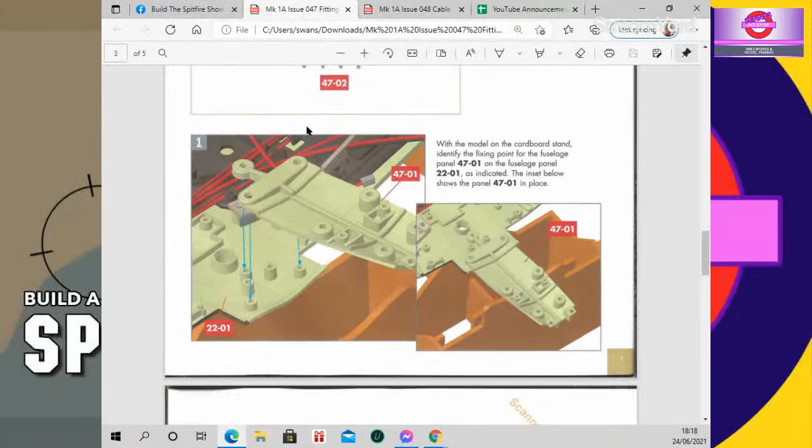So would you like to read the first instruction? I'll make that bigger for you, Chris, so that hopefully I can do it on my monitor. Yeah, no, I'll take up the whole screen with the instructions as well, so that other people can see it as well. Yeah, right. Zoom that in a bit more.

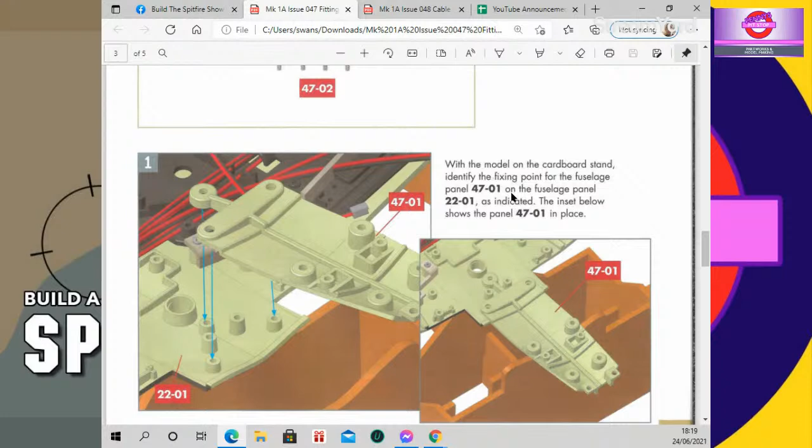There we are. So step 1 is, with the model on the cardboard stand, identify the fixing point for the fuselage panel 47-01. On the fuselage panel 22-01, as indicated, the inset below shows the panel 47-01 in place.

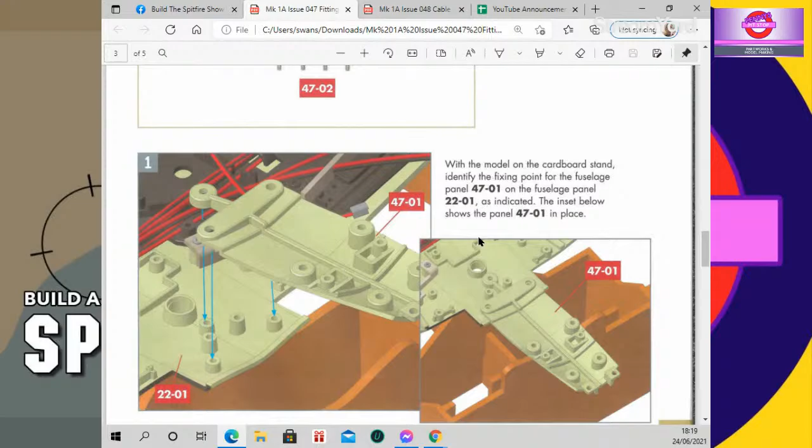Okay, so let's have a look. So I think it'll probably be easy if I switch the camera for this. So I'm going to be doing a lot of camera switches, I'm afraid.

Right, so it looks slightly more complicated than it is, because you've got 3 fixing points here. 1, 2, 3. And you've got 5 holes there. But when you actually bring this on, you can see that these 2 holes are there. I'm sorry that it's a difficult view, but these 2, we ignore them, and we're going for these bottom 2 here to fix this panel on, and then this one comes up through the middle just to add a little bit extra support. So that's going to go on like that.

And I think maybe I'm a little bit wary of this, because obviously this is only supported by cardboard, and we're doing screws into metal.

So obviously if I pushed, I'm going to be pushing hard because it's metal, but it's only supported by cardboard. So I'm really going to support it from underneath. That's why I'm going to do this top screw first.

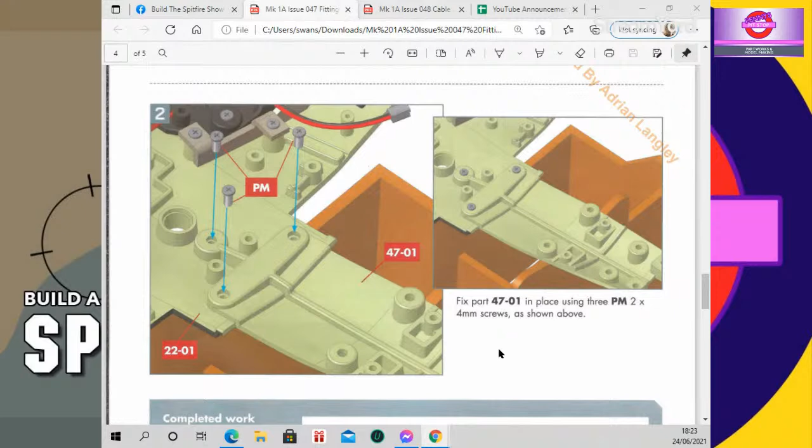Step 2 was fix part 47-01 in place using 3 PM 2 times 4 mil screws, as shown above. So that I've just done. Yeah, this is pretty true, bit of a lesson learned there. I just need to slow down a bit. Maybe I'm a little bit more eager than I thought I was.

Unless it's actually convenient to do that. That's right, I worry about being in a muddle. So that is issue 47 done. I've got a feeling this is going to be much shorter than I thought it was going to be.

There's one part of the hull, which is a cable to control the left aileron, whatever it's called. I'll show you a preview before we go into it. That's the part. So again, this is going to be really short as well.

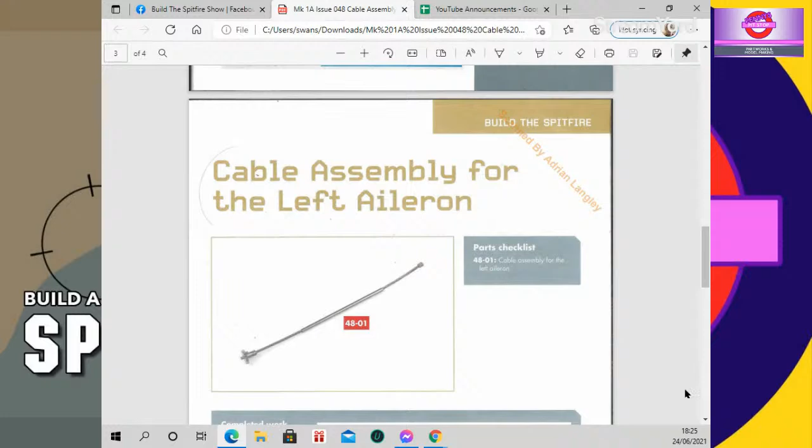And we've got 48 ready on the screen. Issue 48, which is: in this issue, a cable for a cog attached to one end is supplied. This will be fitted in a future issue. So basically, we've just done this issue just literally by taking the plastic off. Cable assembly for the left aileron. It's a tricky word, there's a lot of people who don't pronounce it, and I struggle with it sometimes, but it's aileron. Yeah, and it's the 48-01 cable assembly for the left aileron, and that's it for this issue.

Okay, so let's see how much time I could possibly fill in just on a single part. So what we have is a cable with a cog on the end, and there's obviously some kind of locating peg there.

And then we've got this - would you call that twisted cable? It's cable that's been twisted together to strengthen it. And I notice it's got this sleeve on it, and I know there's a word for that sleeve. I'd suspect there's a little channel going along here. So this is going to go into the wing, and this metal sleeve will sit on there.

If we didn't have that sleeve, as it turns, that twisted cable is going to rub up against the plastic and wear it out. So what this is there for is just so as this goes round, it protects whatever this is sitting on. I know there's a name for this and I cannot remember, and I will bet any money that Love Minis will be the first one to come back with the correct terminology.

I just can't think what it's called. It just escapes me. So yeah, unfortunately guys, that is issue 48.

Yeah, and then so we've got part 49-01, motor and cable. Lovely, so let me move it to this view so you can see the parts. So part 49-01 - now that looks to me, Love Minis would know more than this because she knows so much about electronics. Yeah, that's obviously a geared motor because it's got gears in it, which obviously changes the ratios and the torque.

But I would suspect that because this is going to be going near the flaps, it's a motor that's going backwards and forwards. I would guess that's a stepper motor, not an ordinary DC motor - there's three kinds of motors, and I'm so out of touch with this, but I think this is a stepper motor. And what a stepper motor is, it's controlled by magnets, and it can give very precise movements backwards and forwards by moving this magnetic field around. Whereas a DC motor is literally give it power and it goes round, give it power, change the terminals around, and it goes the other way. This is actually capable of going backwards and forwards.

Yeah, but I might be wrong because I don't know an awful lot about electronics. I've dabbled with Arduinos and things, and it is quite literally a dabble. So this has got 4 wires on it as well, so that's another reason why I think it might be a stepper motor, because they tend to have more wires. Servo, that's the other motor, isn't it? Yeah, so DC motors just tend to go round and round. Stepper motors are very precise movements. Servos tend to just go that.

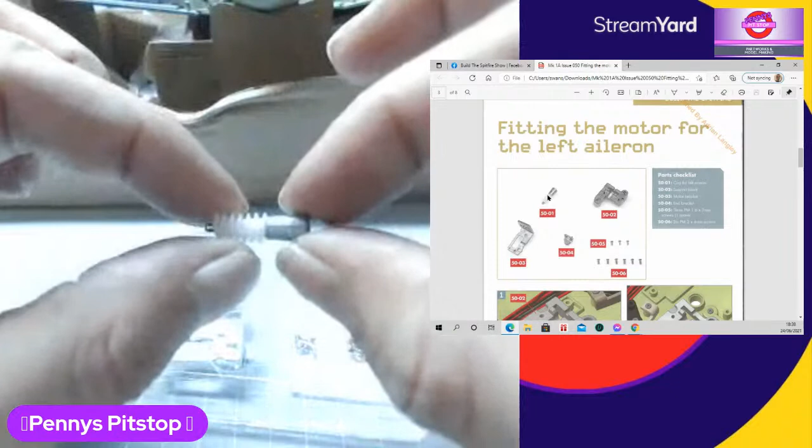Sorry, let me just - that's absolutely terrible. This camera I've got is cheap and it's manual focus, but it's actually really good for the money. But because it's fixed focus, you need to figure out.

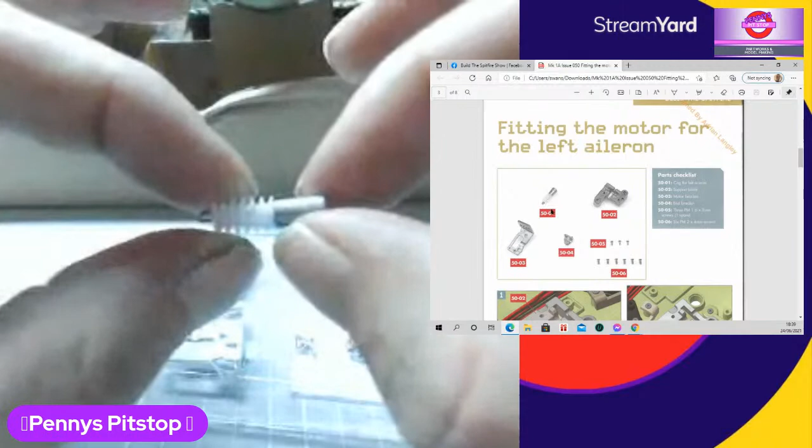So as you can see, this is a metal piece with a little plastic cog, and as you can see from this, it's a screw thread. And as I turn it, I've got my fingernail in the thread, and it's basically a screw thread. So obviously, as this controls something, it's going to push something backwards and forwards.

Okay, so 50-02, support block - I mean not 'black' but 'block'. So I read it as 'back'. So this is the support block, and I noticed it's got the letter L on it, and it's metal. So this is going to make the wing look a little bit meaty, I think.

Okay, so 50-03, which is motor bracket. Right, so obviously because of the title of the piece, that's where the motor is going to sit. Yeah, and that's got an L on it as well.

And 4 is end bracket. So this is it - now this is a very small piece, and I can see that going flying. It's got this little block bit on the end, and just like all the others, it's got a little locating tab on it, so that's useful. And there we go, it's got the letter L on it.

So if we were to open 6 or 7 weeks worth of parts, we could still identify these from the ones that are going to go on the other side. And then part 5 is 3mm, 1.6 times 3 mil screws, 1 spare.

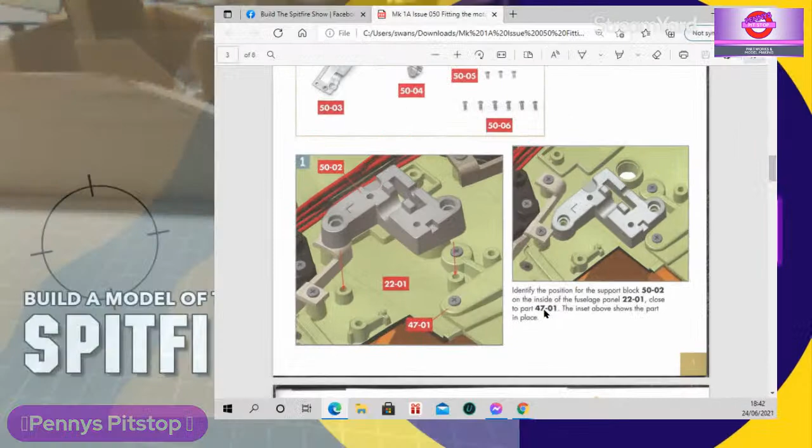Identify the position for the support block 50-02 on the inside of the fuselage panel 22-01.

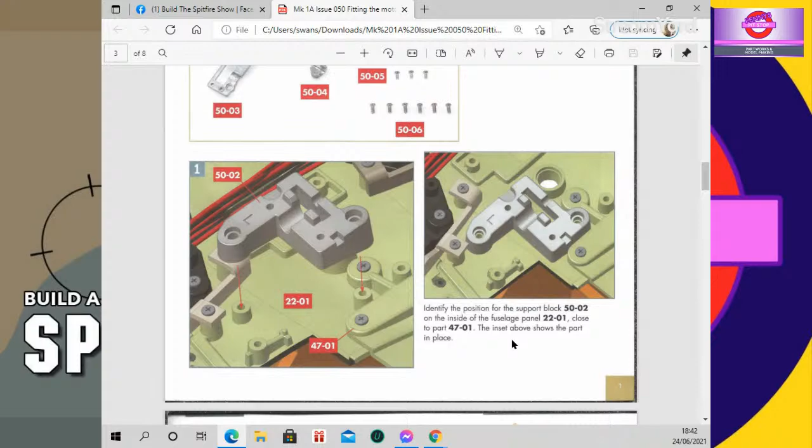Close to part 47-01, the inset above shows the part in place. I've switched to overhead view, apologies if it's difficult to see, but we want the left hand side.

I can clearly see that's a fuselage piece we put in a few weeks earlier. If you remember, there were 5 screws, and 2 screws that we ignored, and I can see it's one of the screws we ignored.

So if I get this motor block and support block, I can see the L is down there, so it's going to go in that position. You can see the L is there, and then there's the hole for the screw.

Look at that, that was almost like it was made to fit. Yeah, like that, and that is a really good fit, as it always tends to be for Hachette parts. I will give them that.

So I think that's stage 1 done. Are you happy with that? I'm very happy, yeah. That's good. Step 2 then, is it?

Yep, step 2. Oh sorry, you want the screen now, don't you? Right, step 2 is fix the support block 50-02 in place with 2 PM 2x4 mil screws as shown below.

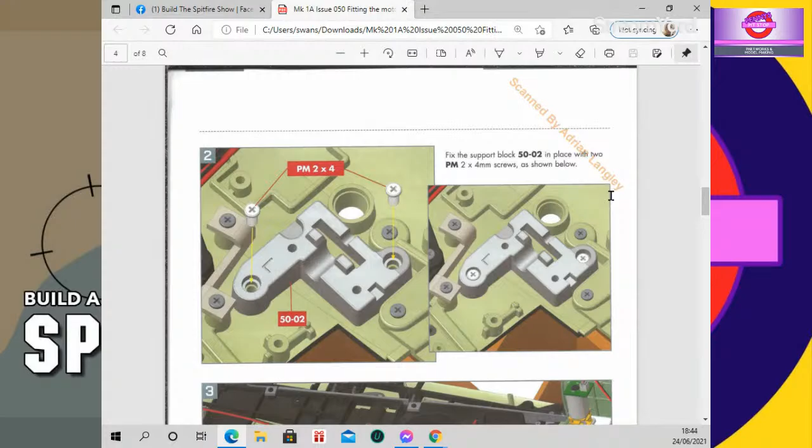Right, I'm just going to make sure I'm not in a muddle with the screws. The longer ones, 2x4 mil, the second set of screws, which I've got 6 of. So that's this set of screws there. I'll just pick 2 of them up.

Normally what I do is I just pop the first one in until it bites, then I pop the second one in. That way, if I've made a mistake, I can unscrew those. Also, now that those are in there just enough to bite, it's very loose, but it's not going to go anywhere.

So now I'm going to make sure I've got my fingers underneath, because I'm going to be pushing down onto cardboard. So we'll do this one in as far as it'll go. Just like before, it feels like I'm screwing into fresh air, but then all of a sudden it just goes home.

So the second one, now that's quite deceiving. That one took considerably more turns to tighten than the first one, but it just kind of catches you off guard a bit.

Right, and then just check that. The question you're always asking yourself is, am I happy with that? I honestly believe that piece is not going to go anywhere. Let me just bring that up to the camera so you can see what I've done, that piece there.

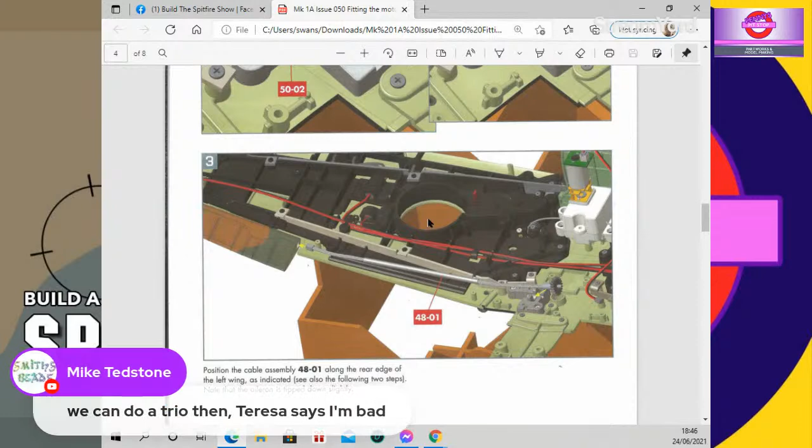So if you want to read out stage 3, I'll just catch up with the chat. Mike says we can do a trio then. Teresa says I'm bad, yeah, I was laughing at it. She says I don't sing, I howl. I think she doesn't appreciate good singing. I got caught singing in the shower, and someone said to me, I thought you said you don't sing. I said, I didn't say I don't sing, I said I can't sing.

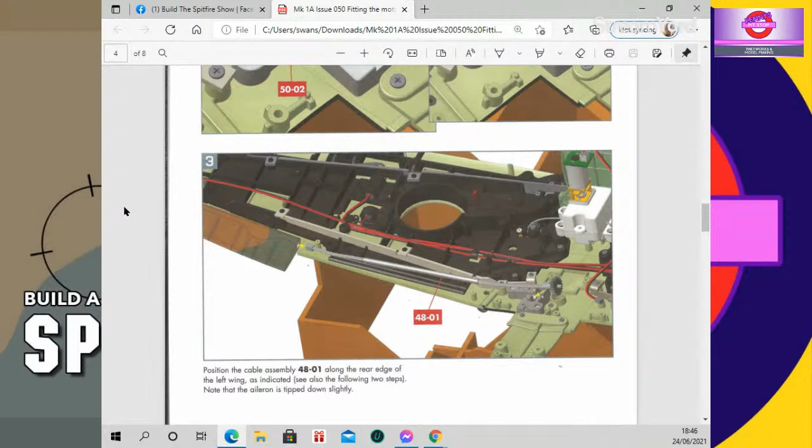Right, so step 3 then. Position the cable assembly 48-01 along the rear edge of the left wing as indicated.

See also the following 2 steps. Note that the aileron is tipped down slightly.

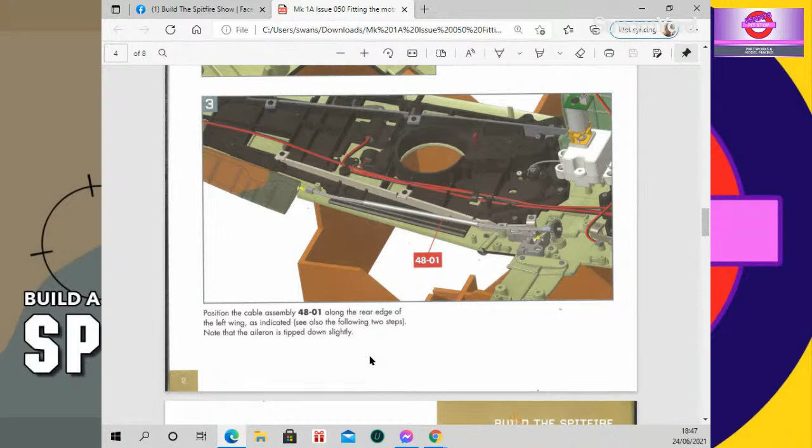I'm starting to suspect that that's why we've got a little tab.

Does it say which? Position the cable assembly 48-1 along the rear edge of the left wing, as indicated. Also see the following 2 steps. Right, as it's saying, see also the following 2 steps.

Yeah, we'll read into them now. Sometimes it doesn't hurt to look ahead. Number 4 says insert the small block on the end of the cable 48-1 into the square socket in the left aileron.

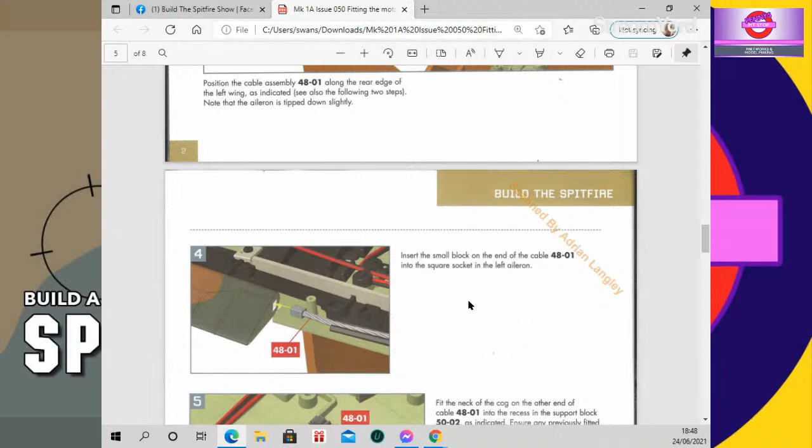Right, okay, in step 5. Yeah, 5 alive, 5 alive.

Johnny 5. Fit the neck of the cog on the other end of cable 48-1 into the recess in the support block 50-02 as indicated. Ensure any previously fitted wires are clear of the cable.

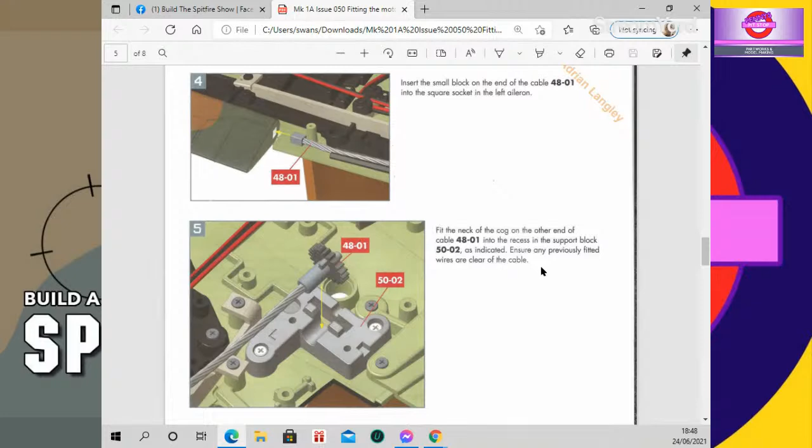Right, and I'm going to ask you to read step 6 as well, it will become apparent why. Step 6 shows the cog of part 48-1 in place in the support block. Note that the tab on the neck of the cog, circled, should be upwards and the ailerons slightly downwards. If this is not the case, reinsert the cable into the ailerons so that it is in the correct position.

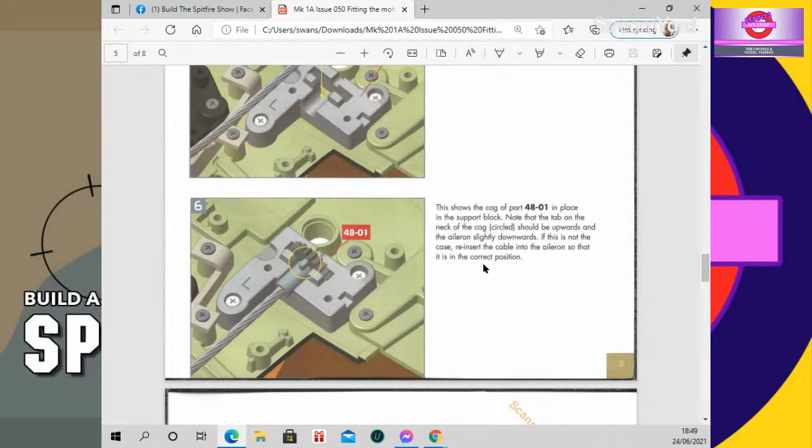So what I'm going to do, slightly cockeyed, is do a test fit first. We have this tab, and it looks like this tab is there to make sure we get it in the correct start position. So with the tab up and this little sleeve, I'm going to place the sleeve on there, then place the cog into there. But notice I'm not putting the other end into the flap, there is a very good reason for that.

One, I don't know how tight that hole is, I may not get it out if I put it in wrong. But if I focus on what this looks like, I can bring this flap up, and now I can start to see this square end on there compared to the square end.

So what I'm now going to do is, just holding this collar down, bring this cog up and out of the little housing. I'm just going to pull it back a little bit - it's very hard to see, and I apologize, but the little end of the wire isn't quite touching the flap. With this held down, I can then bring this up so that the flap is in position to meet up with that, and then turn that slightly, and now I can see the exact position we require. So that is a fairly stiff fit, but it needs to thread in a little bit.

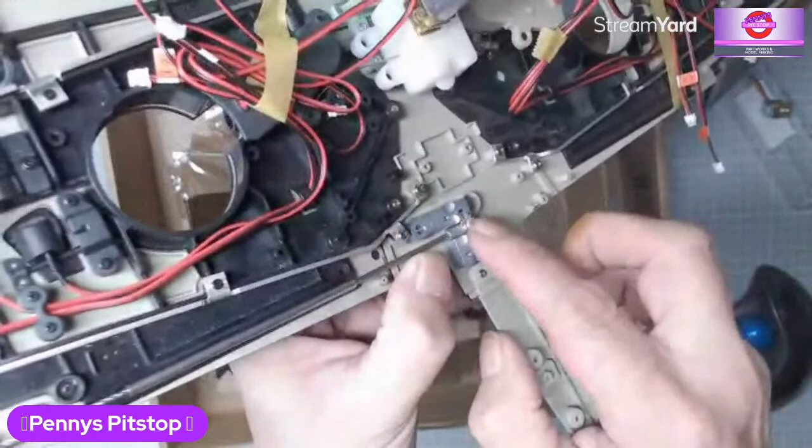Whether that makes mine incorrect, I don't know. But can you see that I'm moving this cog? And that little tab on there, there's two. Let me bring this up. So we've got the tab on there, but we've also got 2 little stoppers there as well. Let me get the screwdriver. So just there and just there, there's little stoppers, so it's limited the amount of travel the wing gets. It can only go that far up and it can only go that far down, and that gives us this much movement on the flap.

So as it's a square, if we readjusted it so that it's in a different position, that's going to move that wing 90 degrees up or 90 degrees down. And I think if we moved that 90 degrees, that would be so obviously wrong, wouldn't it? So I'm happy with that, I'm really, really happy with that.

Do you think, are you happy with that as a viewer, as an outsider, not the person building? Yeah, I think that's brilliant, I'm really happy with that. You know, if I designed this - and I'm not saying I'm a great designer or smart or anything, but I'm not design stupid - I really don't think I could come anywhere close to anything like this. So I really don't regret my decision to build this Spitfire. I think it's absolutely smashing, and I bet there's a lot of people who aren't building it that might be regretting it now. Yeah, look at that.

So, do you want to have a look at stage 7? Because there is a stage 7. In fact, there's a stage 12 as well.

How good is that? Stage 7 then, right, is take the motor bracket 50-03 and the motor and cable 49-01 from the previous issue. Fit the shaft of the motor through the hole in the bracket as indicated. Ensure that you have the motor in the correct orientation.

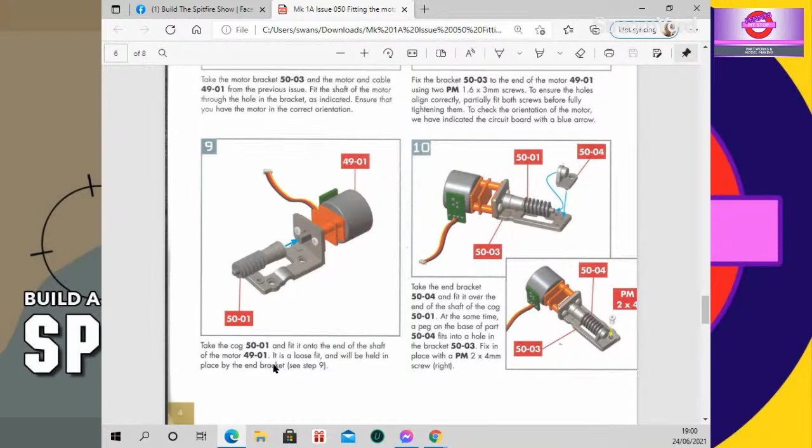Take the cog 50-01 and fit it onto the end of the shaft of the motor 49-01. It is a loose fit and will be held in place by the end bracket.

See step 9. Okay, so sometimes when you look at these parts, you're like, okay, they've given us these parts, I know what it's probably going to do, but I've got no idea how it's going to go together. But we'll just go along with it.

But now it all makes sense. So the end on this motor is not a circle, you can see it's got 2 flat ends. And this is exactly the same, flattened on 2 sides. So there's only 2 positions you can place this in - there's that way, or there's that way. And that just goes in there like that. All that's going to do is, as that motor goes around, it's going to turn those cogs. Simple as that. It is loose, look, so be very careful.

So I would perhaps just pop that down on the table now, and then we can look at the next part. And Love Mini says it's probably a bunch of people who designed it, so I suppose everybody just puts their little bit in, and the sum of the parts is greater than the whole kind of situation.

Well, this magazine's gone cuckoo at the minute. Can you scroll it down just a little bit? There we go - oh yeah, you drag, do you? No, I usually just use the button on the mouse. That's fine, however works best for you, Chris. Looking for the refresh button - let me just bring this magazine and refresh it a minute. It says the page has gone cooked. Right, okay, that's fine. Get yourself into a nice, comfortable position, you can work from there then.

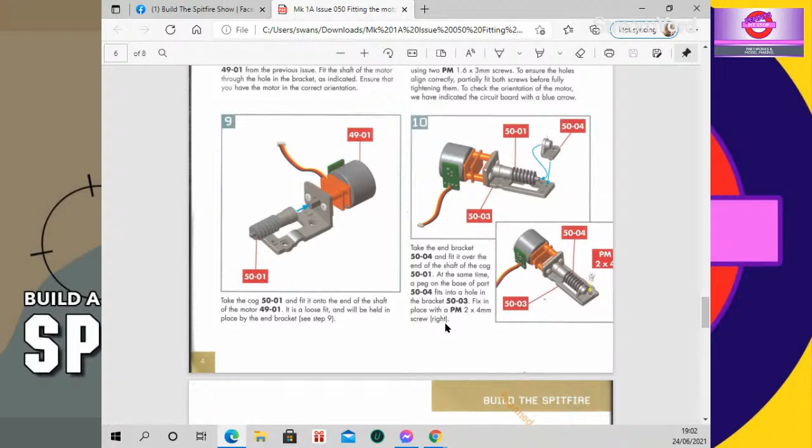Right, it says right on there for some reason. Oh right, as in that's the box on the right.

So I'd made the observation earlier on that this is a locating peg, and I can now see where that locating peg is going to go. There's two holes there - ignore that hole for now. The smaller one is a locating peg, and the larger hole is a screw hole. Although I noticed that little blob sticking out there, what I didn't look at was the hole on the other side, and I can now see that's going to go over there and hold that cog in place. So it's going to be ever so slightly fiddly, mainly due to the size of my fingers. I think the easiest way to do this is to get it into position how you want, put it over the cog, and then bring that locating peg into place. That will leave that screw hole there.

And then obviously that's going to be the 2x4mm screw. Be a little bit careful, that is trying to jump. If it's jumpy too much, what you could do is put a big piece of masking tape around there, leaving that hole exposed. But I'm not going to do that.

But what I should have done, and should do every single stage, and I never do, is get my 2x4mm screw ready on my screwdriver before I put these pieces together. Because I think it'll be easier once I've got that into position, I'm going to hold it down with my thumb so it doesn't move. Now I can grab my screwdriver with my screw loaded up, and in it goes. And once again, it's like screwing into air.

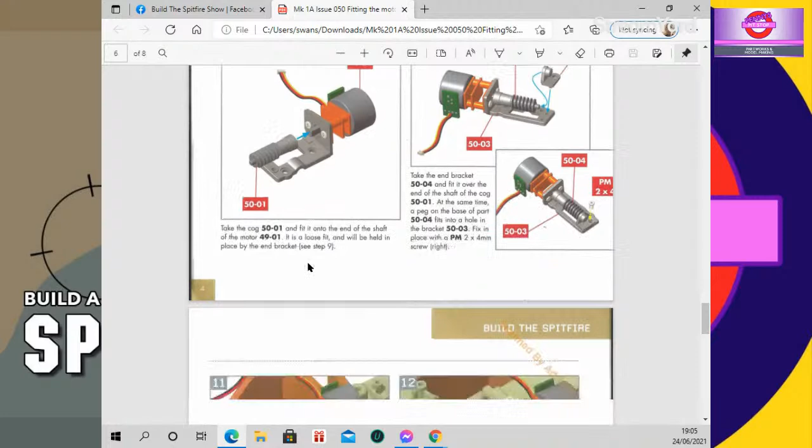Okay, so what is step 11 then? It's like bingo - legs 11. Yeah, that's how it goes. They've changed all the numbers on the bingo now, haven't they? They've modernized them. Apparently it's to try and attract a younger crowd to bingo, because I don't mind this myself.

Yeah, right, okay, step 11. Do you want me to read that, or are you comfortable reading that, Chris? I'm good, I am. Right, okay then, fire away. I'm trying to fix my extra beer.

Ensure that the rectangular peg on part 48.1 is pointing upwards, as circled. This means the aileron will be tipped slightly downwards. Fit the motor and cog assembly from step 10 over the cog on the end of cable 481 - oh, I missed a bit there - as indicated, an opening in the bracket 50-03 fits over the cog on cable 481 so the teeth engage with cog 50-01. Holes in bracket 50-03 align with screw sockets in the support block 52 as indicated.

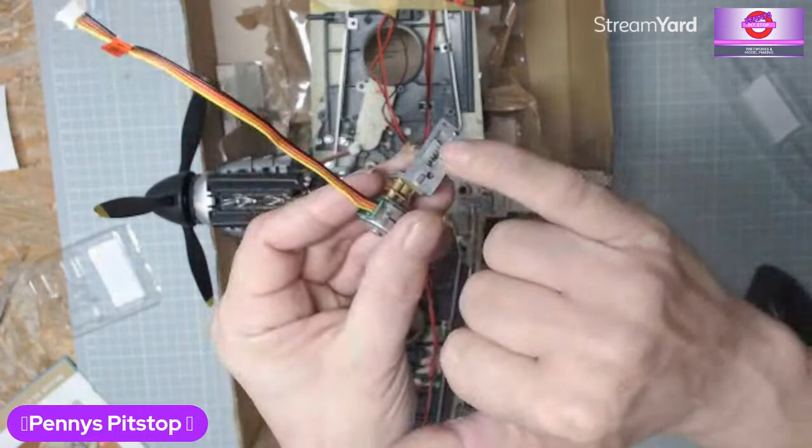And the situation we've got is we have this little hole in the bottom of the bracket, and that's going to enable to see this cog there. That's going to come through there. If you imagine my fingernail is the cog, that's going to come through and engage with the screw thread there. We've got the little humpback bit there, which is going to go over the cog. You see, we've got the collar there, so it's just going to enable it to jump over it.

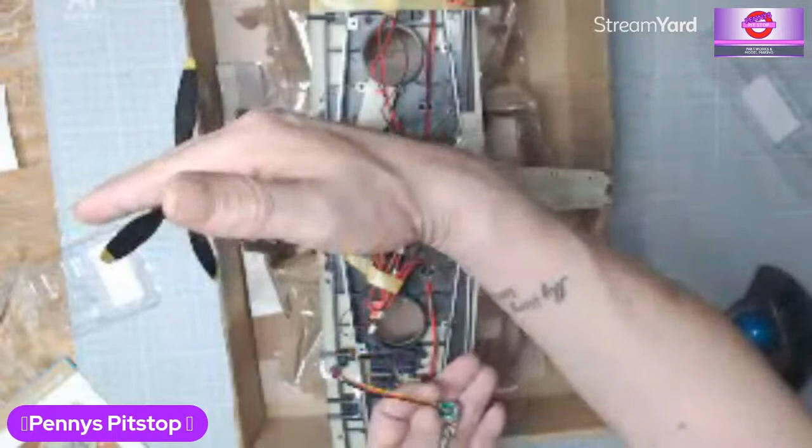And then we've got, let me see if I've got this the right way round. Right, so we've got two screw holes there which are then going to line up with - hang on, I've got to get my orientation, right - so it's actually going to go that way. So these two screw holes, if you turn your Spitfire, rotate it anti-clockwise so it's pointing at 9 o'clock, and then the L is coming down at 12 o'clock. This is then going to go at 3 o'clock with the wire going up at 12 o'clock. Does that make sense? Yeah.

Propellers, right, wire at 12 o'clock, rotate to 9 o'clock, and the wings coming down to 6 o'clock. So that will go over like that. Now the important thing is the little tab on the cog - I'm going to put it halfway between the stoppers. I think that's how it's indicated. If it's wrong, I know how to fix it. And that's going to go over like that.

And what have I just forgotten to do, Chris? No, it doesn't matter because that's the next step. Okay, right, so no - I was going to say I forgot to load my screwdriver up, but I haven't forgotten because it hasn't told us to do it yet. Right, so that is how that's going to go on.

So the motor, or this block, is going to be going backwards towards the tail, and that's how it goes. And I can see that looks like it's engaging. But I also think I had that wrong - I think it just slipped upwards a little bit, so I'm just going to move my camera slightly. But as I'm engaging this motor, I'm using the flap to just move this cog. Once I put this on, don't be tempted to move this flap too much, because you're working against this motor. And that's going to go on. But because of this wire and everything, it's going to be trying to pop off anyway until we get to stage 12, which is the next step.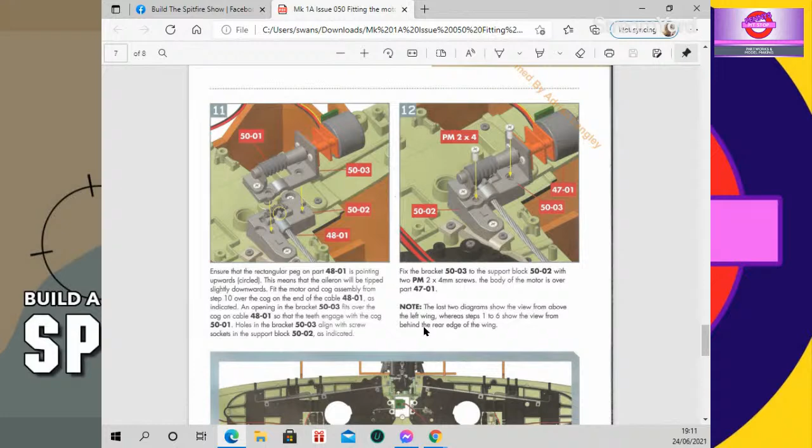That's easy enough, fantastic, right. So yeah, basically, there's a long-winded way of saying pop 2 screws in.

So what I'm going to do is hold this motor in place, and I want to see which screw is going to be easier for me to get to. The hard bit is getting the first screw in. Once you've got the first screw in, it'll hold it down a bit and make the second screw easier. I think it's going to be easier if I hold it there and put the screw in closest to the L.

So look, I've got my screw ready on the screwdriver. That's good, can you believe that? So we'll just pop that in just enough to bite. Yeah, and there, look, you see it's connected.

So now, before I put that second screw in, I just want to check the whole mechanism. It's worth taking a few extra seconds here. The motor is held down. This flap is in the slightly down position, not quite flush with the wing, which is what it was saying in the previous issues.

So now that that's in, I can hold it a little bit better. I'll put this second screw in, because this screw is the last screw, I can drive it all the way home. I want to just support it underneath, because remember it's on cardboard.

And then I'm going to just check the first one, or finish the first one off, and this one can go in as hard as I want. And then I'll just double check the last one, and that is not moving.

I can see another area of concern, which isn't really a problem. Can you see where that motor board is? Very, very close to the fuselage. Now, mine's got clearance, but I would suggest if you haven't got clearance, you've either not put this fuselage piece in, or you've not put the motor in.

So keep a careful eye on that motor board, because these circuit boards are really, really fragile. If you end up screwing that down and it's not engaging properly, it's going to snap it off. So just be very careful there. And then I would say that's step 12 done.

Yeah, so that's going to be extra. That's 4 issues done. And we know the next 3 issues are going to be exactly the same as the last 3 issues, but on the other side.

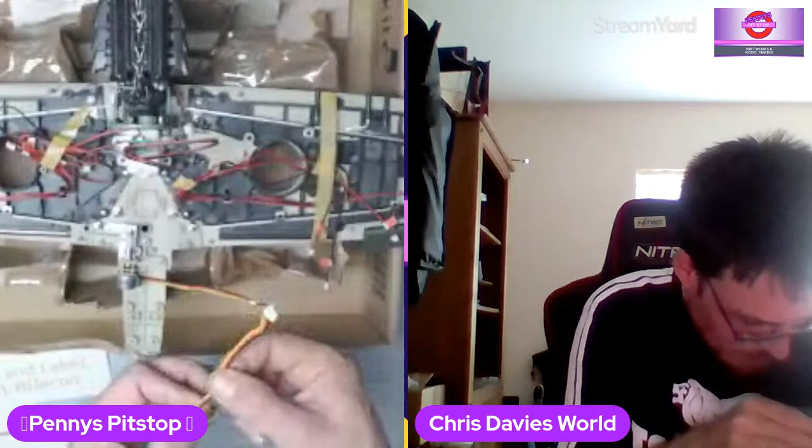So we've got 52.1, which is the motor and the cable, and then we've got 52.2, which is a cable label. And that surprised me - the cable label is M4, and the opposite aileron was M1, if you remember. So that surprised me.

I was expecting M2. So I guess M2 and M3 is going to be... oh sorry, I'm doing it at the wrong end. Remember, it's got to be at the end. My personal preference, I like it about a finger width away from the end, just to prevent a bit of wear and tear when I plug this into the circuit board. And that is issue 52 complete.

And just like before, I'm going to pop that in there like that. Now, I feel like I'm rushing, but I'm not - it's because I've done this before. Obviously it's a little bit easier this time. And I think to explain everything to you all in great, massive detail is almost going to be a bit of an insult, isn't it, because you've just sat there and listened to it in the last 10 minutes.

But I'm just going to have a quick mouthful of drink. You in a whiskey? I don't know - do you know, I'm not a big whiskey fan. There's a couple of spirits that I do like. But obviously, do you know, this will make you laugh - I don't understand all of this science about how much alcohol you can have and how long it takes to get out of your system before you're allowed to drive again.

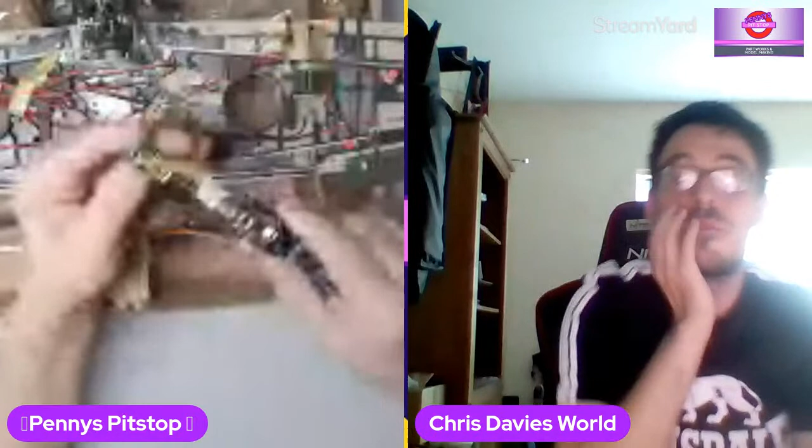I'm going to loosen that first screw. If you don't quite get that in going right, it doesn't go flat. There we go, that's a lot better, so be a bit careful with it. If it's not going in easy, just loosen off the other screw. If you screw one screw in too much, you're going to get that effect, whereas if you keep the screws level, you want to bring them in flat, like so.

I'm doing this to show you guys what I'm doing, and if you can't follow along, just say, and I don't mind explaining. I've got those two screws in as tight as I can, bearing in mind I'm holding this geared motor. I don't want to hold it so tight that I snap it, but I'm happy with that stage.

The next step is to place this cog on. Remember, we've got two flat sides to this motor, and two flat sides to the female part. That's just going to go in like that. I'm actually going to take that off again until I put the next part in.

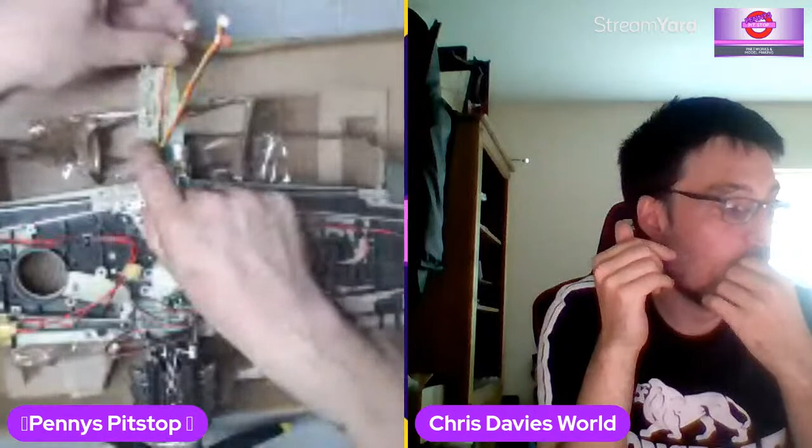So it looks like they're going to channel these wires up through the middle, up to a piece of fuselage we haven't built yet. Does that make sense, Chris? Yeah, the problem is we can bend these wires, but we do not want to kink them. So I'm going to go with that - the wires will be loose and not interfering. I think that's going to be quite good.

Got my screwdriver ready. We'll work out which hole is going to be easiest for us. I think this particular time, that top hole will be easiest. And that's just going to go in - just enough to bite, no more.

Also don't forget, we need to check this wing flap. I forgot to check that, but I just happen to have it correct. This is the beauty of only putting one screw in - I can still adjust that. So, right, that cog is now pointing up exactly halfway through the stoppers.

I'll show you the comparison of the two flaps in a moment. I think it's not so much important to get the flaps in the correct position - I think it's much more important to get the flaps level. So if they're like 1 millimeter too down, as long as they're both the same, they're out by the same amount. Obviously we want to get them perfect, but without them explaining exactly what perfect is, we can only make an educated guess.

Right, so that second screw is in, that flap is in position. I'm happy with that, but that for me is a terrible working position. So what I want to do is flip it around 180 degrees. Take into account, guys, I'm working on the opposite side to the magazine, but I really can't work over the engine like that. So I've got my fingers underneath, support on the bottom, pulling up a little bit because I know I'm pushing down with this screwdriver hand.